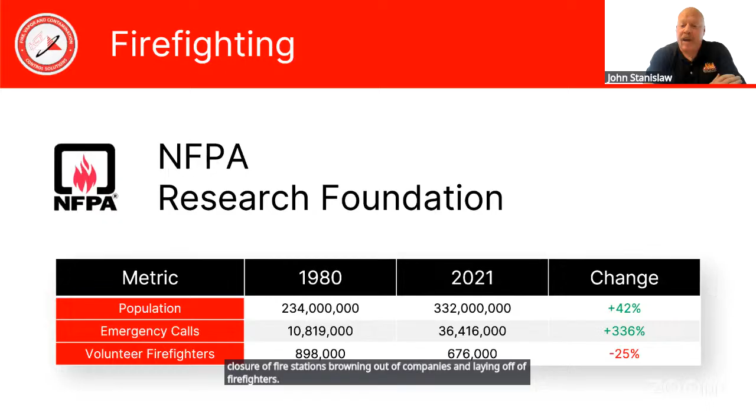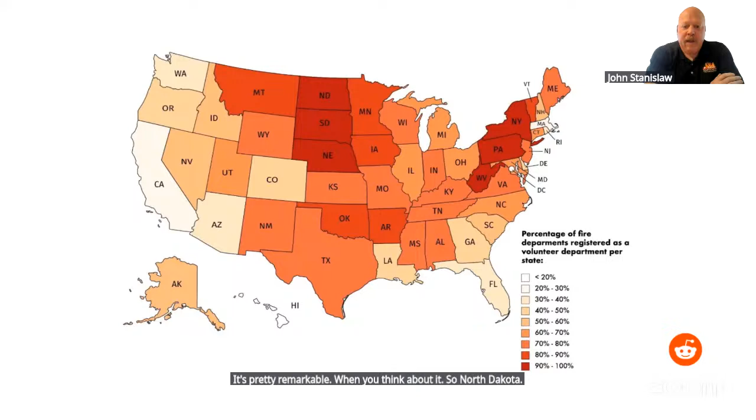This is a graphic that really lays it out for you. When you look right down the middle of the United States and you look at the percentage of departments registered as volunteer, it's pretty remarkable when you think about it. So North Dakota, South Dakota, Nebraska, they're saying that over 90% of their fire departments are volunteer. That's an enormous amount. So you already in those areas tend to have small departments with less people, and it's exacerbated by the fact that now you have even less than when you started with.

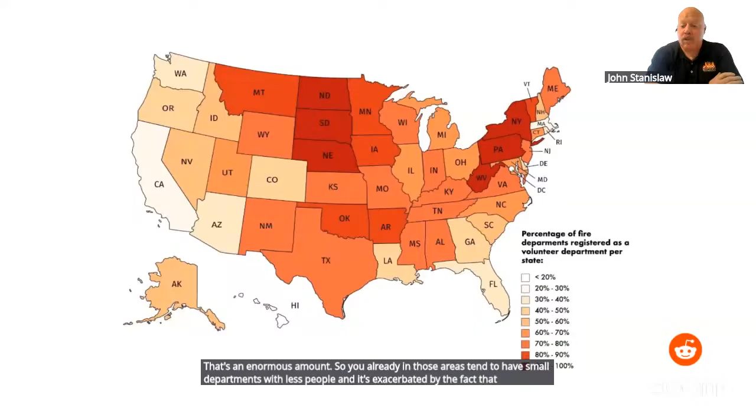Weeks after the Eaton fire ripped through the city of Altadena, just outside of Los Angeles, crews have begun the daunting task of clearing hazardous materials left behind. On Thursday, workers with the U.S. Environmental Protection Agency, or EPA, rummaged through the rubble of scorched plots, plucking out materials like batteries and paint and propane cans by hand. Yes, it's certainly the biggest job I think we've encountered. 22-year EPA veteran and on-site coordinator Harry Allen says it's one of the most complex jobs the agency has ever seen. We want to make it safe for people to come back and look through the remains of the fire without having to worry about explosion hazards and fire hazards or chemical injury.

The EPA is running the initial phase of cleanup before government or private contractors come in with heavy equipment to clear entire lots. In addition to making the environment safe for residents to return, this initial removal phase also ensures that hazardous materials, like lithium batteries, don't wind up in the municipal trash where they can catch fire. President Donald Trump issued an executive order last week directing the EPA to complete the removal of hazardous materials, quote, as soon as practical. The administration gave the agency a deadline of February 25th. And then, the pressures here, people want to return to work, they want to return home, they want to come in and see what's left of their place and try to rebuild. And making that happen quickly for Angelenos.

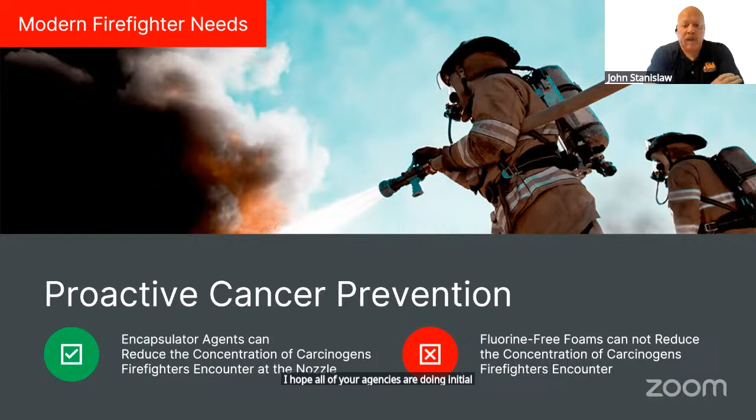Proactive. Proactive is a big word for me. In the fire service, we've gotten very good about being reactive when it comes to cancer prevention. I hope all of your agencies are doing initial gross decon when your folks come out of a structure fire while they're still on air, or after combating a vehicle fire while there's decontamination wipes on your neck and your jaw. You're going back to the station, immediately showering and changing into clean clothes, and then getting into a second set of gear. Those are all great practices that we all should be doing.

Encapsulator agents like F500 bring a new angle to this. We can be proactive. We talked a little bit, and we're going to talk more about that ability of encapsulator agents to interrupt the cohesion of free radicals. And that's where those toxic chemicals are formed. Clemson University said a solution of F500 sprayed over a fire can reduce smoke, soot, and toxic gases by up to 90%. This is proactive.

When you go through the doorway flowing water out of your nozzle that has an encapsulator agent solution, you are proactively decontaminating the environment ahead of the nozzle. You're limiting the exposure to your people of those materials. And then whatever does get on them, we address with those reactive decontamination means.

So lithium-ion batteries, right? That's the 800-pound gorilla in the room right now for the fire service and industry. They are everywhere. Every single one of you watching this is likely watching it on a device powered by a lithium-ion battery, if you're using a phone or a laptop. They are in scooters, tablets, our vehicles, our homes in the way of battery energy storage systems, industrial environments. They are in the musical greeting cards that you buy at the supermarket. Those are tiny little polymer pouch lithium-ion batteries. Vapes are another great example.

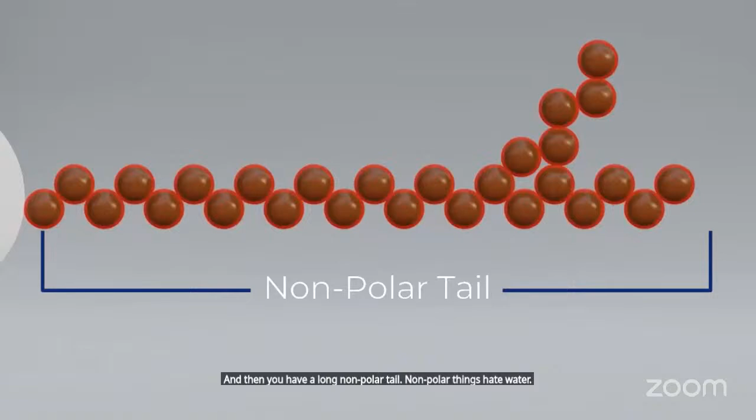You have a polar head. Polar things love water, want everything to do with water, want to be in water. And then you have a long non-polar tail. Non-polar things hate water, will do anything to get away from water. So when it's either batch mixed or picked up with an inductor or an injection system, once those molecules get into the water stream, they will form a spherical micelle. The polar heads will face outward towards the water, and the non-polar tails will face inward to get away from the water.

Now, once these individual water droplets leave the nozzle, the spherical micelles on the surface will break apart. The polar heads will nestle up against the surface of the droplet. They want to be next to that water, and those non-polar tails are going to face outward. Meanwhile, inside of the droplet, you will have millions and millions of these microscopic sized spherical micelles. And they're bouncing around in there, right? They're like little Ferraris racing around. They'll race out, they'll hit the surface of the droplet, they'll absorb heat, and they'll drive back inwards. That's the process of thermal conveyance.

So that is why a water droplet treated with an encapsulator agent solution can absorb significantly more heat than an untreated one. So a plain water droplet will boil at 212 degrees. A water droplet treated with an encapsulator agent solution will boil at 248 degrees. Have we changed water? Absolutely not. Water is still fundamentally water. What we've done is we've added an agent that makes that water more efficient at absorbing heat. And at the same time, we give it the ability to encapsulate hydrocarbon molecules.

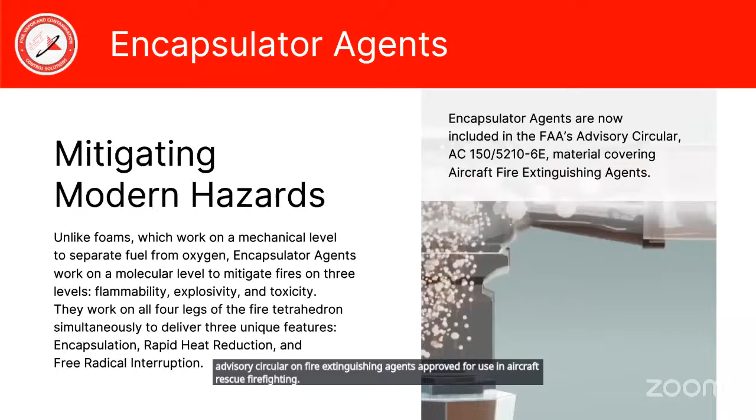And we're attacking the four sides of the fire tetrahedron with the encapsulation, rapid heat reduction, and interruption of free radicals. Because of these things, encapsulator agents are now included in the latest FAA advisory circular on fire extinguishing agents approved for use in aircraft rescue firefighting. This is just one of the latest approvals that we've received for F500.

So what you're looking at here is some gasoline on the ground. This firefighter can apply a 3% dilution of F500, mixed with water, combined with agitation. Notice he's not trying to make a gentle blanket. He's vigorously agitating. That agitation process allows the spherical micelle to encapsulate those flammable liquid molecules. He's going to come back now with the torch, and the fuel's not going to ignite.

Notice he's walking through it. There is no blanket. This solution looks like 2% milk when it comes out. We're not covering and blanketing the fuel. We're encapsulating the fuel. That fuel is locked up. It will not burn now.

This gives you superior protection, especially in, say, a vehicle extrication, right? So you have flammable liquids on the ground. Your folks have to work on that to extricate. You can take a hand line or our TKO nozzle, a Pro Pack. You can use extinguishers. You can encapsulate that fuel on the ground. Your people can work in it and not have to worry about creating and maintaining a blanket.

And again, this proactive ability to reduce the hazards we're exposed to. How do we reduce the carcinogens we're exposed to on the fire ground? These carcinogens are formed at the flame front by the cohesion of free radicals produced by the fire. That's why when you see F500 being applied to, say, a stack of tires or a flammable liquid fire, you will see the fire is still burning and the smoke will instantaneously disappear. We've stopped the creation of those smoke, soot, and toxic gases.

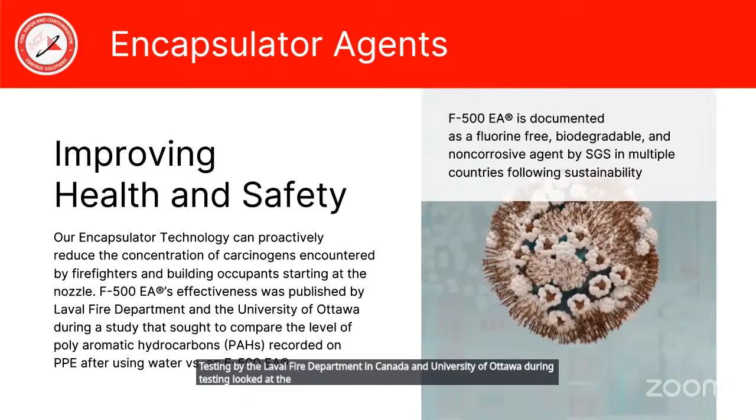Testing by the Laval Fire Department in Canada and the University of Ottawa looked at the levels of polyaromatic hydrocarbons recorded on PPE after using water versus F500. What they did in Canada, they got a farmhouse. They did NFPA research burns, which allowed them to put ordinary combustibles that you'd find in a structure, synthetics like TVs, carpets, sofas, and the like. They set 4 identical fires. 2 were fought with plain water and 2 were fought with an encapsulator agent solution. Significant reduction in the amount of polyaromatic hydrocarbons found in the hoods of the firefighters. So proven scientifically to reduce the toxic and cancer-causing things we get exposed to.

So we talked a little about Section 7.7 in NFPA 18A in 2022. First of its kind standard for things like encapsulator agents. Standard on water additives for fire control and vapor mitigation. The criteria to meet that includes a spherical micelle stability test, and Section 7.7 evaluates the concentrate's ability to render fuel non-flammable. Again, it's very important when someone comes to you and talks about, hey, we have an encapsulator agent. These are questions you need to ask them. Have you passed? Can you prove to me through third party that you have passed the Section 7.7 testing? The criteria is outlined in NFPA 18A, and they should be able to prove to you that they can pass that.

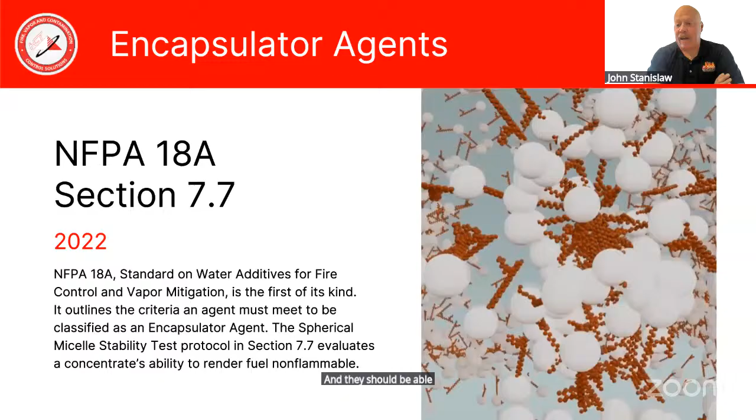Hey, John, I've got a quick interruption. Yes. Next to the share button on your screen, there should be a little up arrow or down arrow. Can you click on that and see if it offers you to split video from slides? Sure. I see share. Where would that be? I think it's next to the green share button with the little green up arrow or down arrow, the way I'm seeing it. Right now your image is over the top of the text on a lot of the slides. Oh, okay. I'm not sure how to do that in the middle of the slideshow. I have a funny feeling if I try to do that, I may just make myself disappear. It's got you right over the left-hand half of the slides, blocking some of the text, not all of it. Okay. Sorry about that. You'll be all right. All right, we'll work through it. And any questions anyone has, we'll address at the end.

One of the neat things, again, we talked about NFPA 18A and Annex 4.3. We have over 15 years of extensive third-party testing from all over the world, not only in the United States, but in Europe.

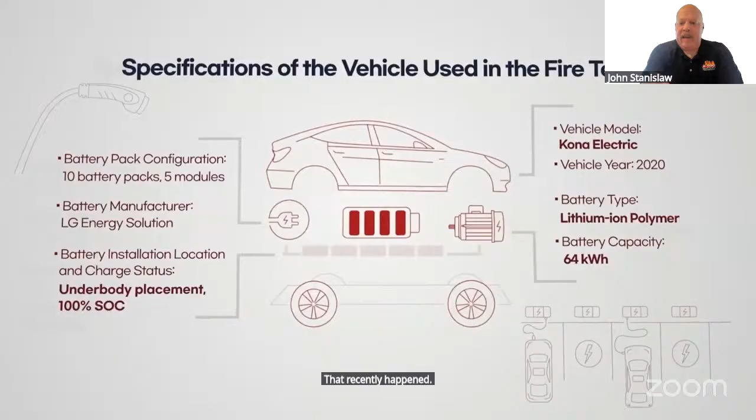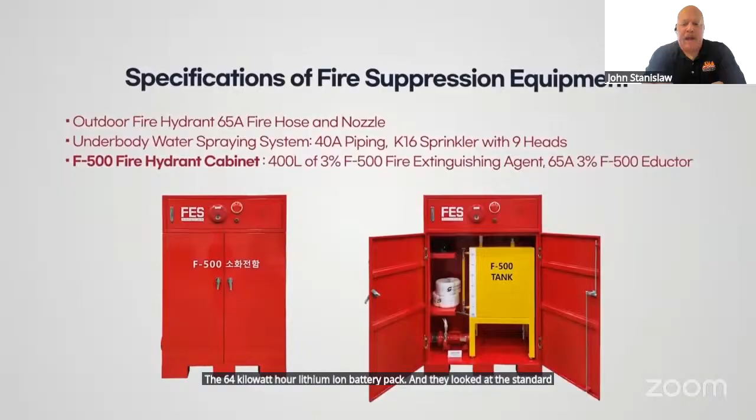So this is testing out of Korea that recently happened. So what they did was they took a Hyundai Kona, brand new, the 64 kilowatt hour lithium-ion battery pack. And they looked at the standard parking garage standpipe system that they have, uses an eductor, a low pressure eductor, and a concentrate tank. And they took some F500 and put it in that system. This is very interesting. These are designed to work off of hydrant pressure. This is a 40 to 50 PSI low pressure system.

So they're using 2.5-inch hose with roughly a 50-gallon-a-minute fog nozzle. This is not a high flow hand line, and you'll see the way the hose kinks during the video. So they set up an extremely well-instrumented, very complicated testing criteria and invited VIPs, members of industry, members of the Korean Fire Service to come attend and watch this. So using the F500 encapsulator agent, you're going to see really how well it works combating all sides of the fire tetrahedron. But real world testing.

So we have this brand new Hyundai Kona, heavily instrumented. They went and put sensors in the lithium-ion battery pack, in the different modules in there, and they set their criteria up to look at something. So what if a thermal runaway happens and the vehicle catches fire? Well, unless you have this happen in the parking lot of your fire station, there's going to be delay in response.

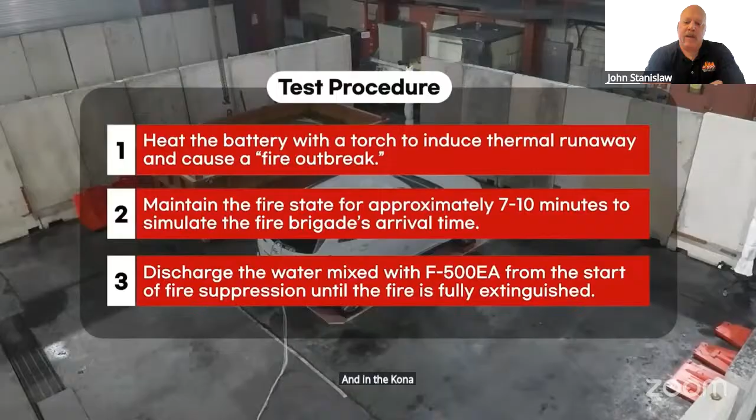And so what they figured into the test was, after they induce a thermal runaway using a propane torch to heat up the lithium-ion battery pack, and in the Kona, the pack is sort of an L-shaped pack. It's partially under the hood, and then it goes under the front of the vehicle. So you're going to see them slide this propane torch up underneath the vehicle, and you can see the wiring for the instrumentation. And they're going to use this to create heat to induce a thermal runaway.

Then, once the vehicle starts burning, once their instruments have shown them that that battery pack is in thermal runaway, they're then going to wait 7 minutes. That is the average response time for a municipal fire department in Korea from the time of the receipt of the alarm till they arrive on scene. So again, they're giving this fire the time to build. And so the firefighters that are going to come in and attack this fire are going to face the situation that they would face if they showed up at a real fire on scene.

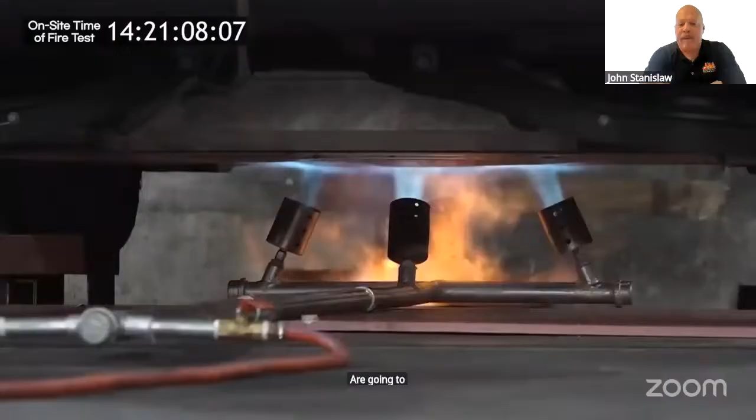So again, we're using this to induce the thermal runaway, and they're going to wait. They're watching the instrumentation. They're watching the heat up. They're going to adjust it a little bit to make sure that they're not starting the car on fire. They're getting the battery pack on fire. You'll see a little bit of dripping, burning plastic from the casing on the underside of the car, but this fire is going to begin in the battery pack and then propagate to the vehicle and not vice versa.

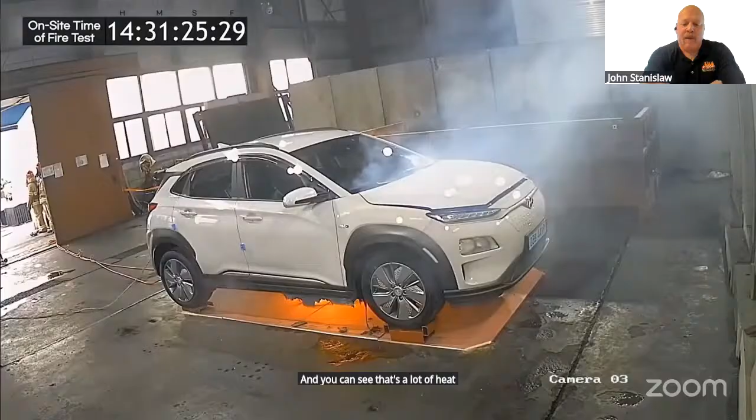So we're going to get this car cooking here, and you can see that's a lot of heat. You see that plastic starting to melt down there. Again, multiple cameras, multiple instrumentation. This is a very scientific study being done for the government of South Korea to determine if they would approve the use of encapsulator agents.

So 11 minutes in, we see the thermal runaway begin. We not only know this by the kind of explosive outbreak of the fire, but again, that instrumentation pigtail that's coming out of the vehicle has told the folks that are monitoring it that the battery pack is in fact in thermal runaway.

So one of the things we need to remember, as many of you know, is individual cells create modules, modules create packs. So in this case, the entire battery is not on fire. Only some modules are on fire, right? So the fire is burning. Again, we're giving that 7-minute pre-burn, and we're letting that fire now get into the cabin of the car.

You're going to see the interior of the vehicle begin to burn until we have a fully involved, well-developed fire in the vehicle. Once they're given the okay, the firefighters are going to enter. And again, I'd really like you to look at the 2.5-inch hose line they're using. You'll see how much it's kinking and kind of folding over their shoulders and under the arms as they bring it in. We're only talking a pressure of 40 to 50 psi, and a flow of about 40 to 50 gallons per minute. This is not a high flow hand line.

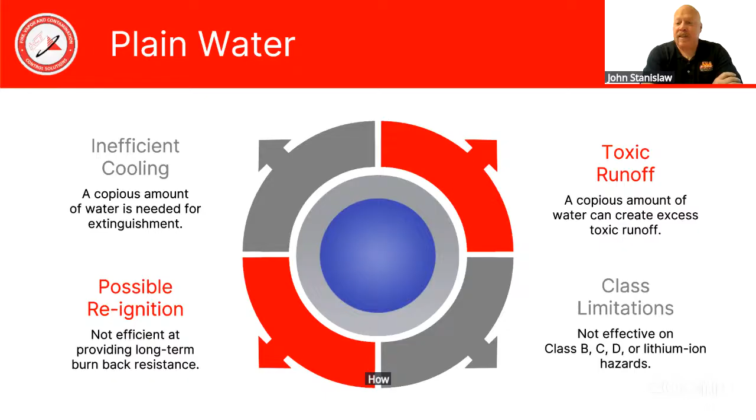Up on the highway, even for city departments, big city departments. You're up on a freeway, you're up on an expressway, a tunnel, a bridge. How much water can you get to the scene? Water is not a really effective agent.

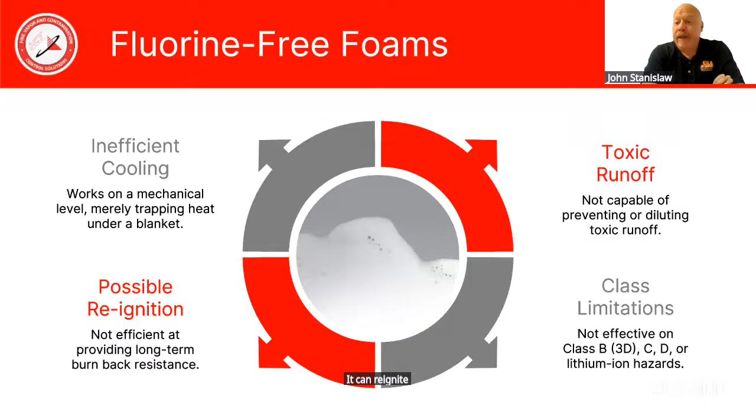Fluorine-free foams, like we said, work on a mechanical level. They merely trap the heat under a blanket. They do nothing for the toxic effects and runoff. It can reignite. We worry about breaking the blanket. And they have class limitations, right?

But then encapsulator agents, again, we're attacking multiple sides of the problem. We're drastically reducing the heat, using much less water. We're providing that stable long-term burnback resistance. We're stopping the production of toxic smoke, soot, and gases.

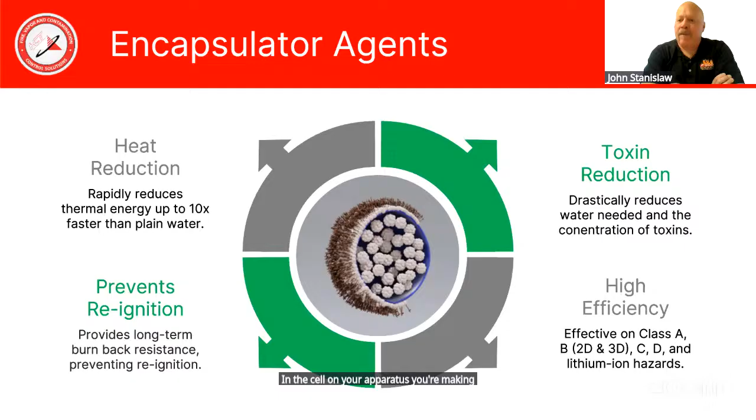And we're extremely efficient. Again, Class A, Class B, 2 and 3D Class B fires, energized electrical equipment, lithium-ion batteries, Class D metals, structure, grass, wildland, rubbish, works great. Again, you've got 20 gallons, 30 gallons, or 40 gallons of agent in the cell on your apparatus. You're making that apparatus a Swiss Army knife. You're making it useful against any class of fire you encounter.

The agent contains no fluorinated active ingredients. Why do I say the agent contains no fluorinated active ingredients? Well, because the municipal water that you may be mixing this with may contain PFASs. Unfortunately, in most of the world today, you will find what they call an acceptable level of PFASs in drinking water, okay? So the concentrate, when you get it from us, there are no fluorinated agents in it, okay? And this has been proven by multiple testing laboratories worldwide.

It is biodegradable. F500 is approved by the United States EPA as a surface washing agent. It biodegrades naturally in the environment. It is not persistent in the environment. It actually helps bioremediation of hydrocarbons. It accelerates the natural bioremediation. It makes those encapsulated hydrocarbons more amenable for the microbes in the soil to eat them.

It's non-corrosive, pH of 7. People often ask, what about our pumps? What about our booster tank? What about our nozzles? Again, for Hazard Control Technologies, F500EA, we have letters of compatibility from folks like Hale Pumps, Pro Poly. Again, if someone comes and says, I have an encapsulator agent, ask them these questions. Who do you have letters of compatibility with?

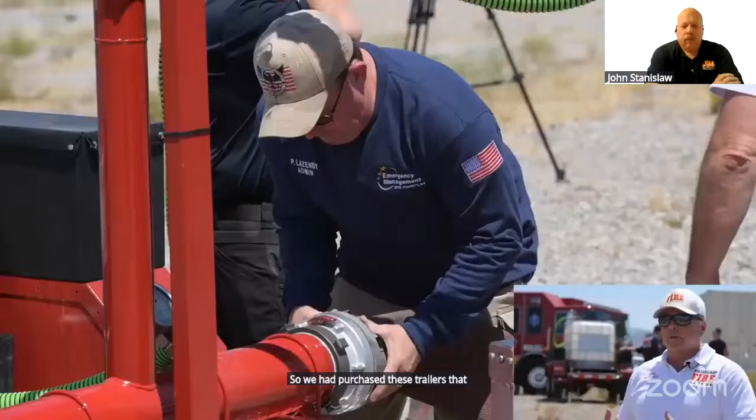So we had purchased these trailers that are capable of not only deploying hand lines, but also master streams, deploying great amounts of product and water. But our goal, because we don't have a lot of water available to us on the highways, was to minimize the water aspect and ascertain a product that would allow us to best maximize our suppression efforts. How fortunate we are to have such grants available to us, because it allows us to meet our objectives in ensuring a safe environment.

So when he was combating the tire fires, I hope you noticed how the smoke simply disappeared. The tires were still burning and that smoke was gone, right? And I find it very prophetic how he was talking about limited amounts of water, because prior to their crash back in July, many of you may have heard about this, was the Tesla semi-truck in California on I-80 that shut down I-80 for 2 days. They deployed over 50,000 gallons of water to try to fight the fire.

And because it was threatening to spread to become a wildland interface fire, they actually wound up calling in air tankers to do retardant drops around the perimeter of the fire. This is extremely inefficient. It's inefficient from a firefighting standpoint, it's inefficient from a cost standpoint, and it's inefficient from a commerce standpoint, right? They basically had to let this semi burn itself out.

And then what happens? In September of this past year, we had those 2 semi-trucks collide. The one that was hauling 31,000 pounds of lithium batteries was heading to a Tesla factory. Nye County showed up. They fought the fire. You can see their trailer in action, and they used exactly 5,500 gallons of water with the F500 EA. They called the fire under control in 2 hours, but they had knockdown within the first 8 minutes. And the gentleman who heads up Nye County Emergency Management reached out to us and said they had their first deployment and it worked as advertised.

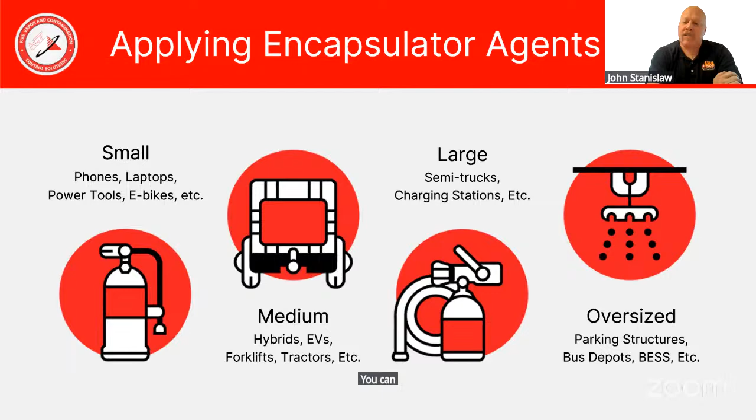Maybe your administrative folks are running all EV or hybrid vehicles. What are your plans? You can retrofit F500 systems into the sprinkler system, protecting your apparatus bays and stations.

When we talk eductors, know your flow, especially for onboard systems. A lot of small Class A foam systems, the Husky 3, for example, that's a maximum of 3 gallons per minute of concentrate. So folks will buy this and figure out I can run a 3% solution out of my deck gun. Know the limitations of your equipment. Standard eductors, they have to be pumped at 200 PSI at the inlet unless they are specifically marked as a low pressure eductor. Know what it can do. Make sure you're getting a continuous solution.

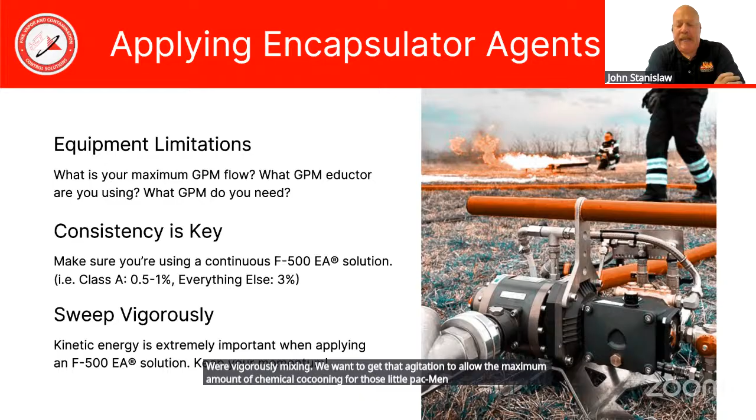And like we talked about in the video with the extinguisher, vigorous mixing, that kinetic energy is critical when we talk about encapsulating things like flammable liquids. It's a mindset change. We've always been taught to gently apply Class B foam. Yes, Class B foam, but when we're trying to encapsulate a flammable liquid with an encapsulator agent, we're vigorously mixing. We want to get that agitation to allow the maximum amount of chemical cocooning for those little Pac-Men to go in and eat those hydrocarbons. So training and equipment knowledge is very important.

So the other question a lot of folks ask is, well, John, that sounds great. Who's using it? Well, our largest user right now is the City of Chicago Fire Department, followed right behind by Columbus, Ohio. Chicago and Columbus are the two largest cities by population in the Midwest, and both of them are F500 users. Mesa, Arizona uses it. The Port Authority of New York and New Jersey uses it to protect the bridges and tunnels of New York. Obviously, an electric vehicle on fire in an underwater tunnel is a bad thing. So they're using it on their bridge and tunnel trucks.

We're in departments large and small. We're in 3 Department of Energy sites. We're up at Idaho National Laboratory. We're at Oak Ridge National Laboratory, and we're at the Pantex Nuclear Weapons Facility in Texas. It's a very widely used product. The Port of Portland Airport recently adopted it for electric vehicle firefighting in the parking garages on the ramp. So more and more departments are coming on board with this. They're trying it, they're testing it, they're doing their homework and their research, and they're very pleased with the results that they're getting.

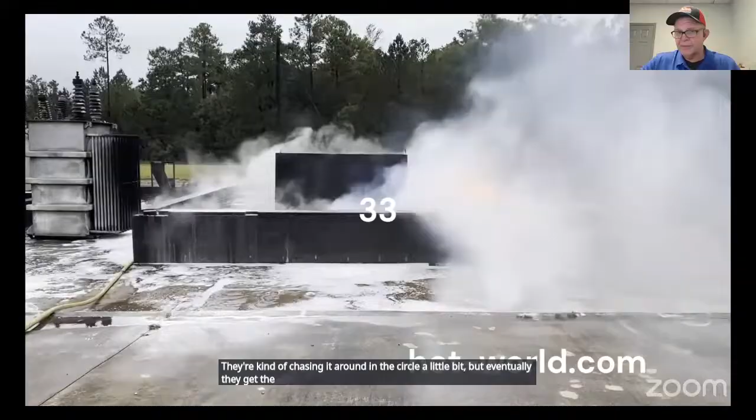They're kind of chasing it around in the circle a little bit, but eventually they get the entire surface encapsulated. Metal's cooled off. Think about it, you only really have to encapsulate the top ½ inch to get that fire knocked down, and then you can figure out what to do with the rest. Got a little fire on this side.

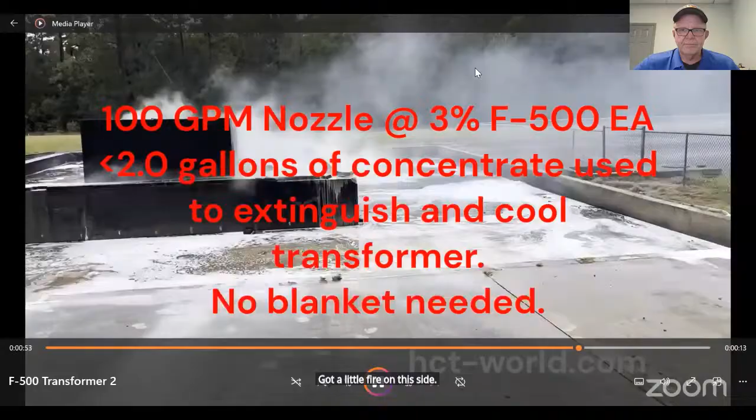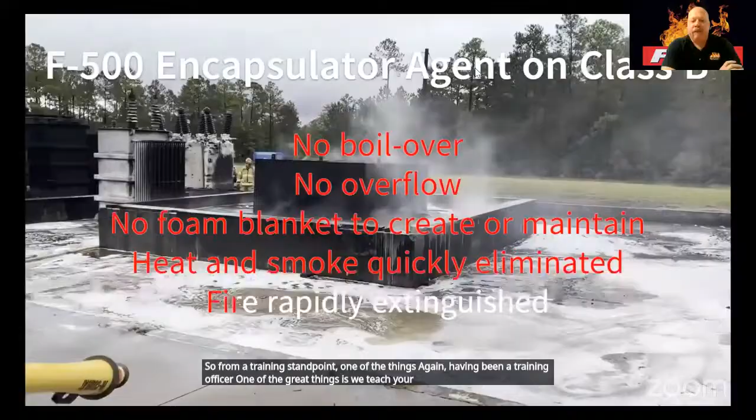So from a training standpoint, having been a training officer, one of the great things is we teach your firefighters to fight fire like you're fighting it with water, right? So take that narrow fog pattern, you go over it and you just fight it. You don't have to change anything. You don't have to have special technique. We've had people say it is extremely forgiving of poor technique. So you just go in there, you fight the fire like you'd fight it with water, and you can see they put those flammable liquid pits out.